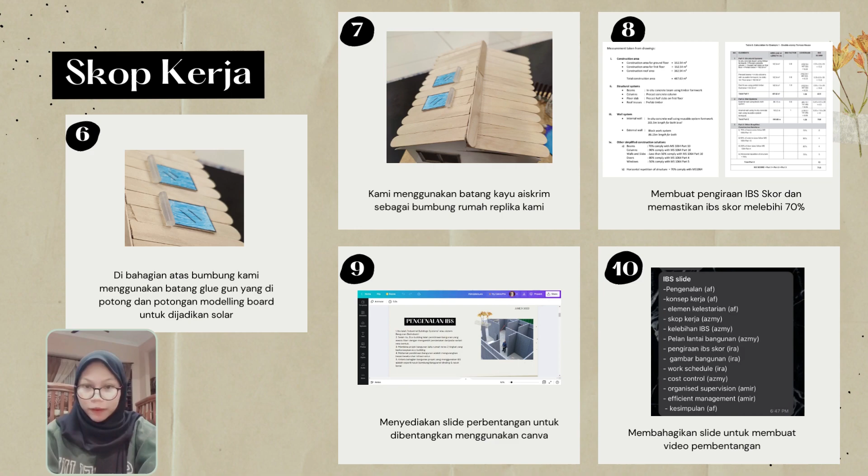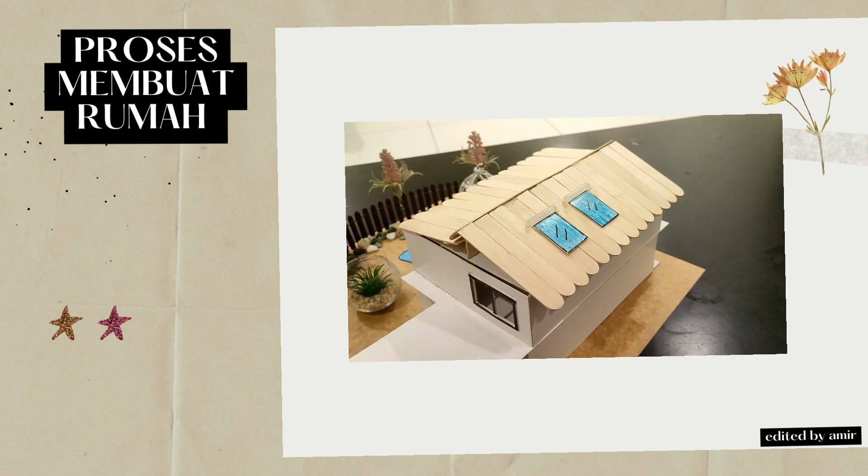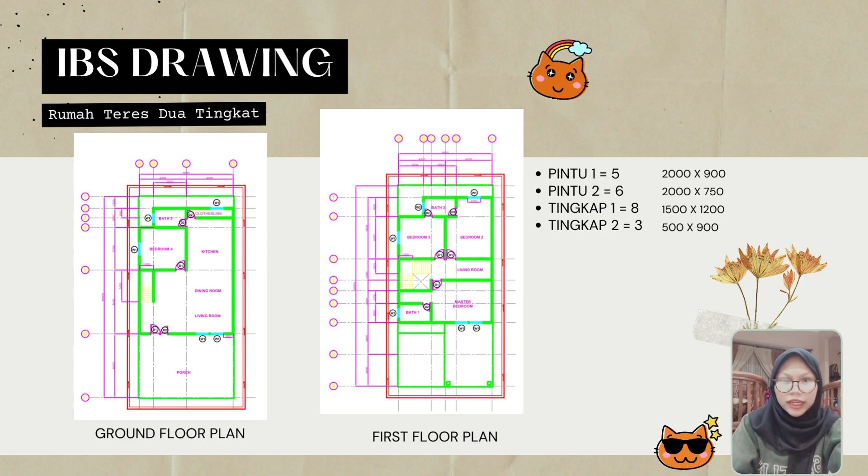For IBS score for construction area, for ground floor, first floor, roof area, we use 162.54 meter square. For total construction area, we get 487.63 meter square.

Next, structural system. For beam, in situ concrete beam, we use timber formwork. For columns, precast concrete column. For floor slab, precast half slab on first floor. And lastly, roof structure, we use prefab timber.

For wall system, for internal wall, in situ concrete wall using reusable system formwork, 105.5 meter length for both levels. For external wall, we use block work system, 86.15 meter length for both.

Next, other simplified construction solution. For beam, we get 70%, columns we get 90%, and walls and slabs we get less than 50%, doors we get 80%, windows we got 50%, and lastly, horizontal repetition of structure we get 70%.

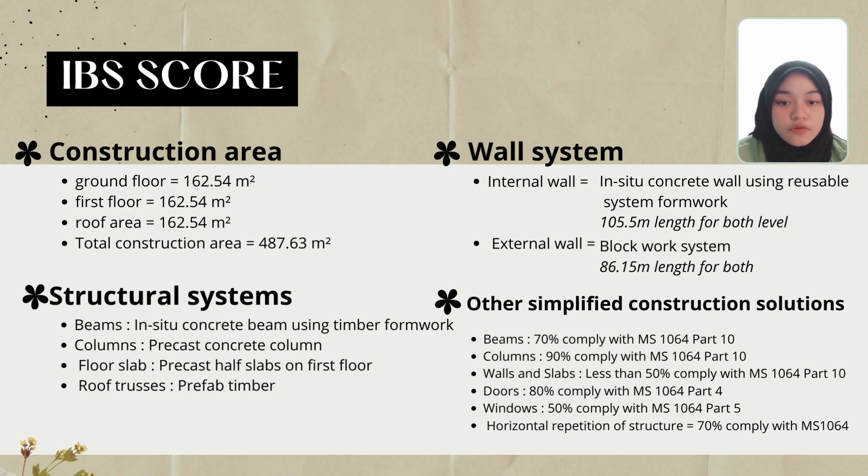Okay, I will explain how we get IBS score for the elements. First, in situ concrete beam using timber formwork plus precast concrete column plus precast half slab on first floor plus prefab timber. The area is 162.54 meter square. For the IBS factor, we got from data 0.8. For the coverage, we have to divide area 162.54 by total area 487.62. The answer is 0.33.

For total of IBS score, we get 0.33 multiply 0.8 multiply 50. The answer is 13.2. Next elements from precast beams plus in situ columns with reusable formwork, no slab. First floor area, the area is 162.54 meter square. For the IBS factor we got 0.8, the total of coverage we got 0.33, the total of IBS score we got 13.2.

0.33, and total of IBS score we got 16.5, and total area for part 1 we got 487.62 meter area. For coverage, total of coverage for part 1 we got 1.00. For IBS score we got 42.9.

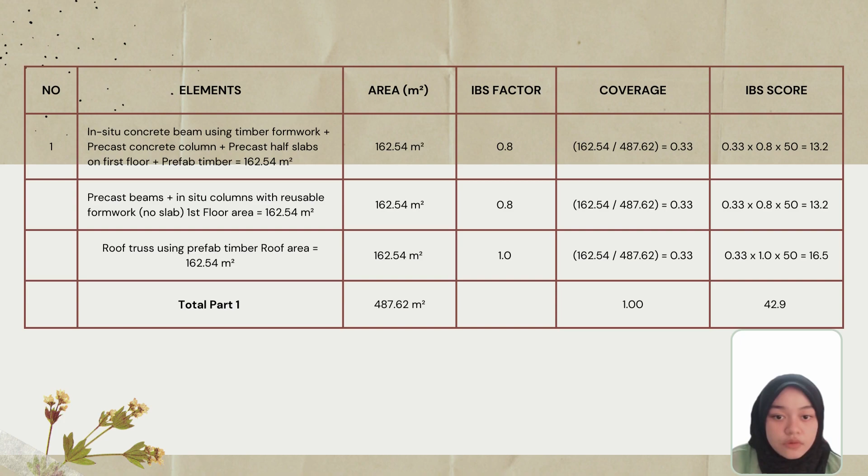Elements for part 2, we are using external wall using block work system. Area we got 86.15 meter. IBS factor we got 0.5. The total of coverage we got 0.45. The total of IBS score we got 4.5. Next, internal wall using in situ concrete wall using reusable system formwork.

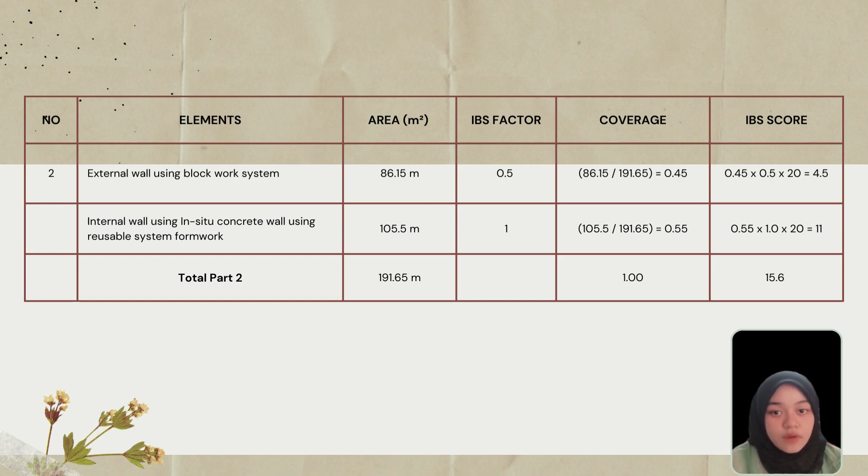The total of area we got 105.5 meter. For the IBS factor we got 1, and the total of coverage we got 0.55, and the total of IBS score we got 11, and total of area we got 191.65, total of coverage we got 1.00, and lastly for total of IBS score for part 2 we get 15.6.

For part 3, the elements of 70% of beam size, the total of coverage we got 70%, the total of IBS we got 2. Element of 90% of column size we got 90%, and the total of IBS we got 4. Next, 80% of door size we got 80%, and the IBS score we got 4. Horizontal repetition of structure we got 70%, and the IBS score we got 3.

And total for part 3 for IBS we got 13, and total IBS score for part 1 plus part 2 and part 3, the total of IBS score we got 71.5.

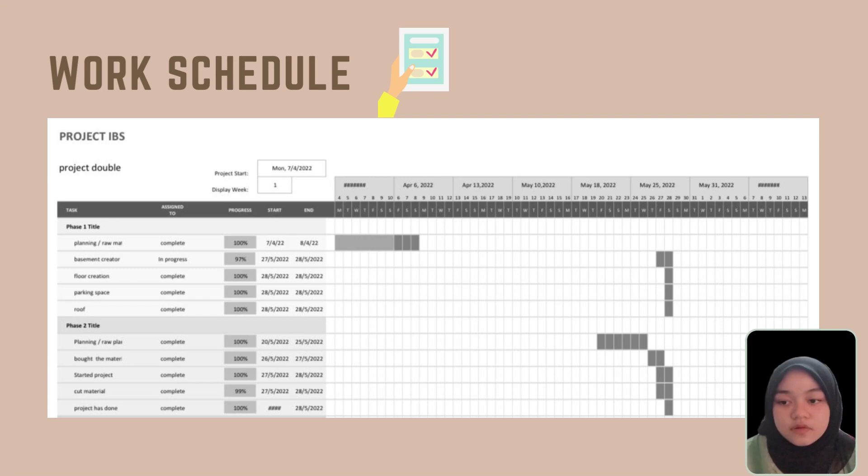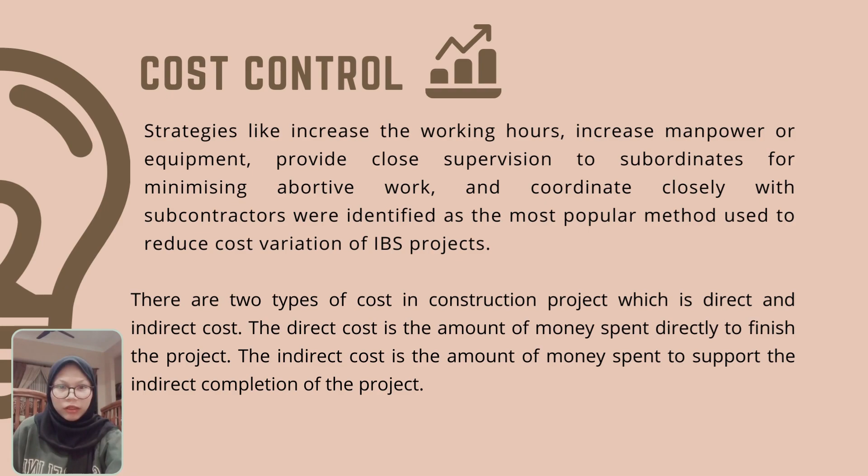Next, cost control. Strategies like increase the working hours, increase manpower or equipment, provide close supervision to subordinates for minimizing abortive work, and coordinate closely with subcontractors were identified as the most popular method used to reduce cost variation of IBS projects. There are two types of cost in construction project, which is direct and indirect cost. The direct cost is amount of money spent directly to finish the project. The indirect cost is the amount of money spent to support the indirect completion of the project.

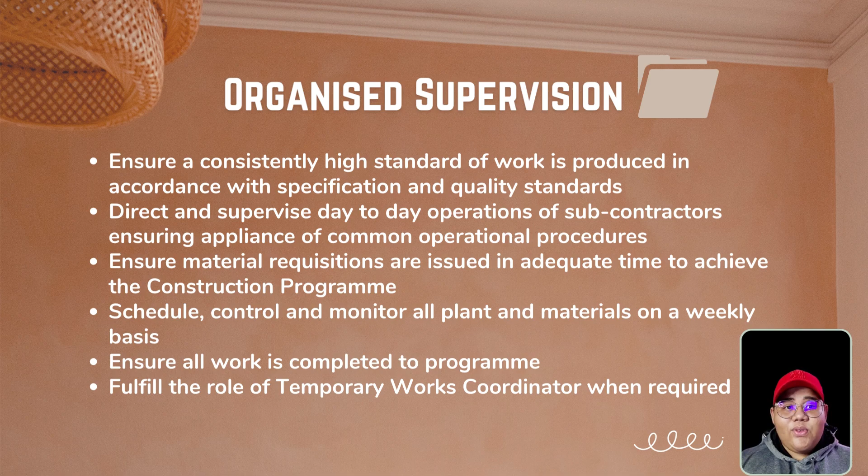Seterusnya, organised supervision. Yang pertama, ensure a consistently high standard of work is produced in accordance with specification and quality standards. Yang kedua, direct and supervise day-to-day operations of subcontractors, ensuring compliance with common operational procedures. Yang ketiga, ensure material requisitions are issued in adequate time to achieve the construction program. Yang keempat, schedule, control and monitor all plant and materials on a weekly basis. Yang kelima, ensure all work is complete to program. And the last is fulfill the role of temporary works coordinator when required.

Next, efficient management of time and resources. First, plan the project. During the planning stage, it is also crucial to select the best construction method to use, timely ordering of materials, and scheduling when resources should be present on the site. Next point, take at least 10 minutes each day before starting to check on the previous day's accomplishment and see whether the plan for the new day is in sync with the current progress. If not, then make a quick adjustment and notify the crew immediately.

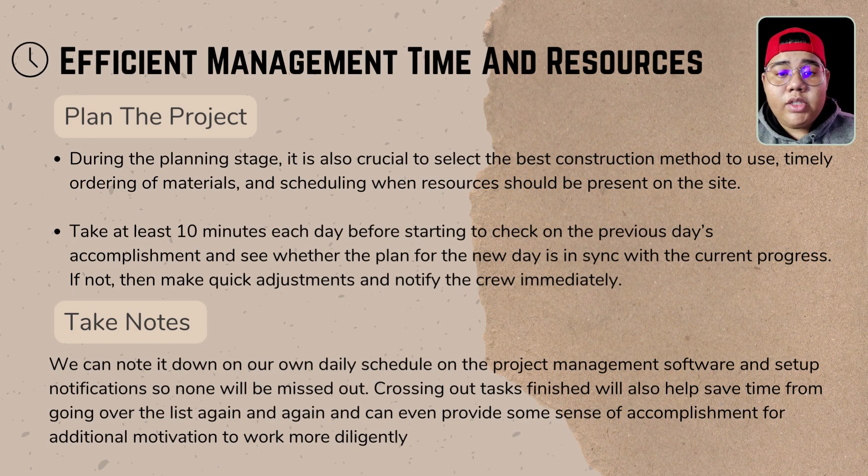Second, take notes. We can note it down on our own daily schedule on the project management software and set up notifications so none will be missed out. Crossing out tasks finished will also help save time from going over the list again, and it can even provide some sense of accomplishment for additional motivation to work more diligently.